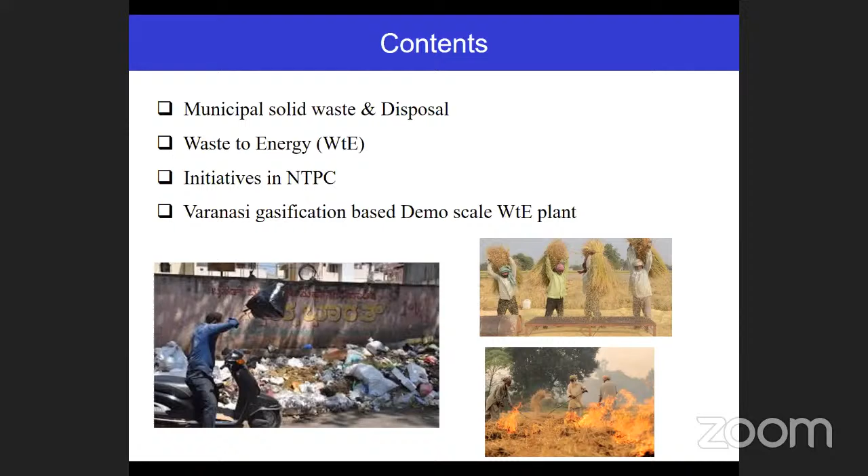Let us see what is meant by waste to energy. In this presentation, I will briefly cover contents like the opportunities for waste to energy in India, the generation potential availability in India, why we are going for waste to energy and not other technologies, and the various initiatives taken in NTPC. I will also cover a little about our maiden initiative in Varanasi, where we have installed a waste-to-energy plant based on gasification technology, which is one of the proven technologies in this sector.

When it comes to waste to energy, there is a lot of waste available — different kinds like municipal solid waste, animal farm waste, e-waste, and hospital waste, which people are familiar with. Another area is construction and demolition waste, meaning construction material waste like concrete, whenever you demolish any building or structure, you ultimately end up with construction and demolition waste. These are different kinds of waste we deal with in day-to-day life, but today we will concentrate mainly on municipal solid waste, which we call MSW.

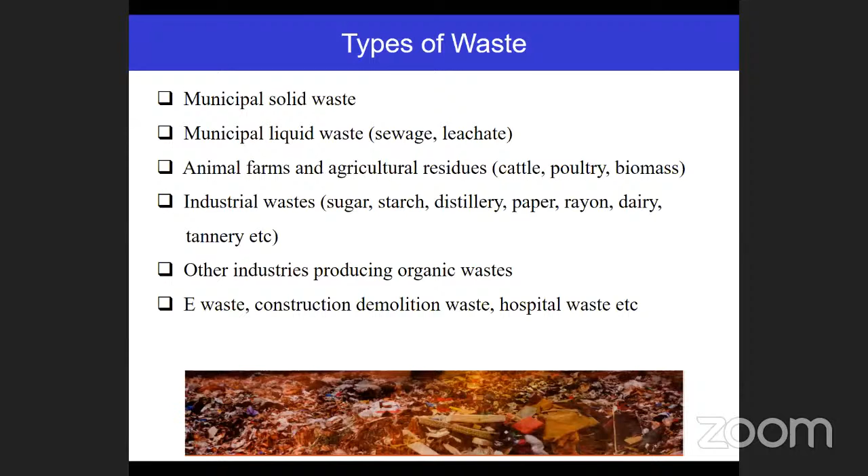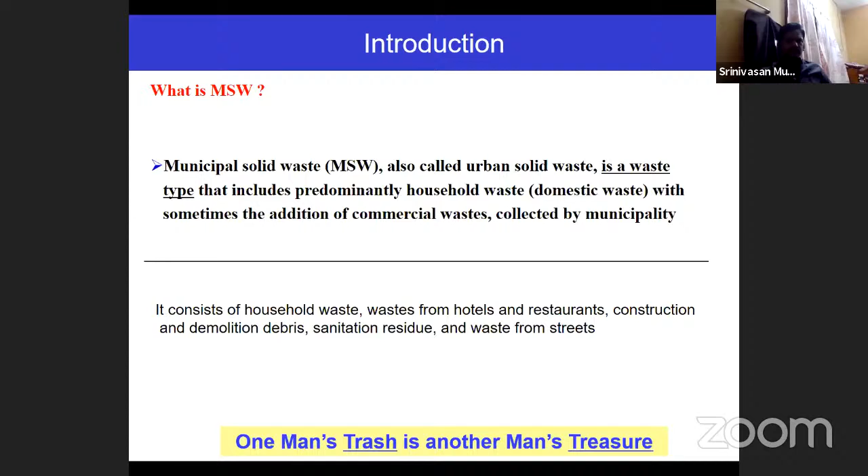The question arises, what is meant by MSW and why the name comes. This is simply called municipal solid waste: M for municipal, S for solid, W for waste. People may ask why it is called municipal - because basically it is the waste we generate in day to day life, like kitchen waste, paper, food waste, vegetable peelings, rags, and packaged materials. It originates from our household.

It is basically the waste from hotels, restaurants, or household, mainly household. Other things are minor in nature. But nowadays, one man's trash has become another man's treasure. I have been giving this presentation for the last decade, about 10 years, so I always quote this example.

There are three things you cannot avoid in life: birth, death, and waste. Whatever action we do, whatever business or activity, we ultimately end up with some kind of waste - it may be liquid, solid, gaseous, or radioactive. Every activity in society ultimately ends up in waste. But we generally call it waste until we find some useful application for it.

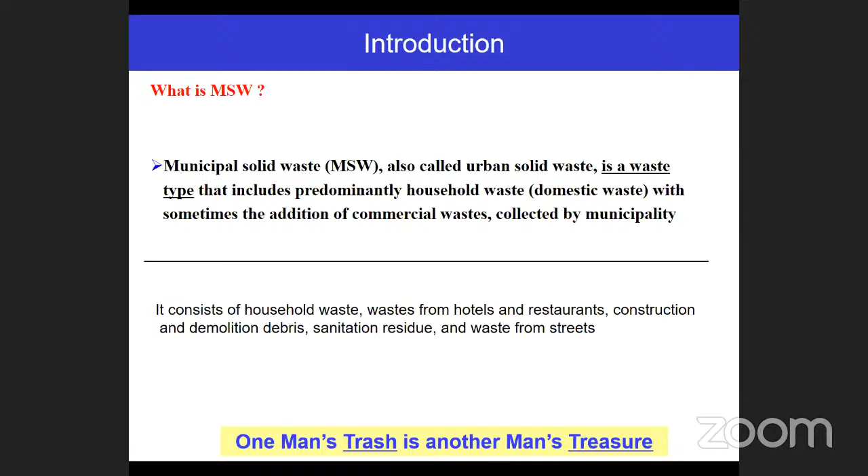So far we used to throw that cord between baby and mother, but now it has value attached to it. Whenever value is attached, we never call it waste - it becomes a resource. Similarly, we used to throw out garbage with no value attached, simply terming it as waste. But if somebody takes that waste and generates power or some useful application, it becomes a resource. So there is nothing called waste in the world until you find some useful application for it.

For example, dioxin and furan are carcinogenic gases - colorless, odorless, and not visible. These gases are produced in dump yards. In Chennai near Perungudi, there are very big heaps made of this waste, and it started burning. Any organic material kept for a long time - first the moisture in the waste gets squeezed out, and you see that black color liquid come out, called leachate. The leachate mixes with groundwater and highly pollutes it. Then as the water comes out, it becomes dry.

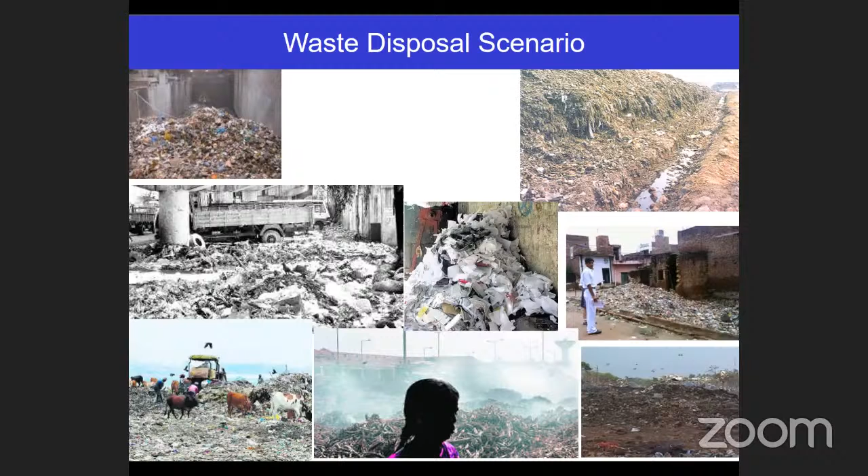But nowadays people have started giving importance to waste disposal as well. That's why I told you, there is no material in the world we can term waste until we find some useful application for it.

We must also be very careful about technology selection, the kind that people used to promote. Foreign countries generally take care of most technology development, so we must be careful in selecting or importing technologies. The classical example is we use real lemon for hand wash, but artificial lemon for making juice, when it should be the other way around. That's why we are in the dark, unable to distinguish which one is correct. So we must be very careful about technology selection as well.

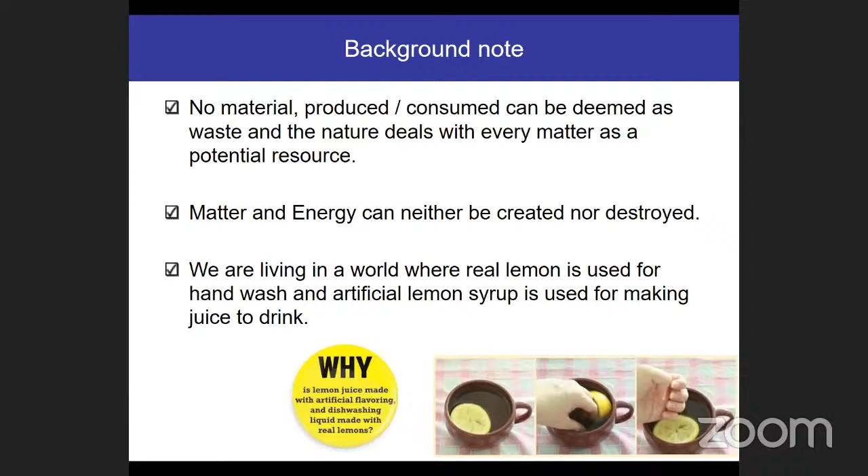Is the slide visible now, sir? Yes, sir, yes sir, please continue.

Now let us see about waste to energy. Whenever you go into any topic for scientific research, it's better to find out the history of the problem.

I am working in a coal-based power plant, that is NTPC. We are generating more than 65,000 megawatts in the country, and we are the single largest company in India. We generate power mainly from coal, almost 70%, and the remaining 30% from oil, gas, and recently we entered solar, wind, and other renewable energy sources.

As a mechanical engineer you can appreciate that there are different kinds of fuel used in our power plant: coal, gas, and oil. Even under coal there are different kinds - anthracite, bituminous, and lignite, because NLC is there, so people are aware about NLC. That is also a coal, but a different kind.

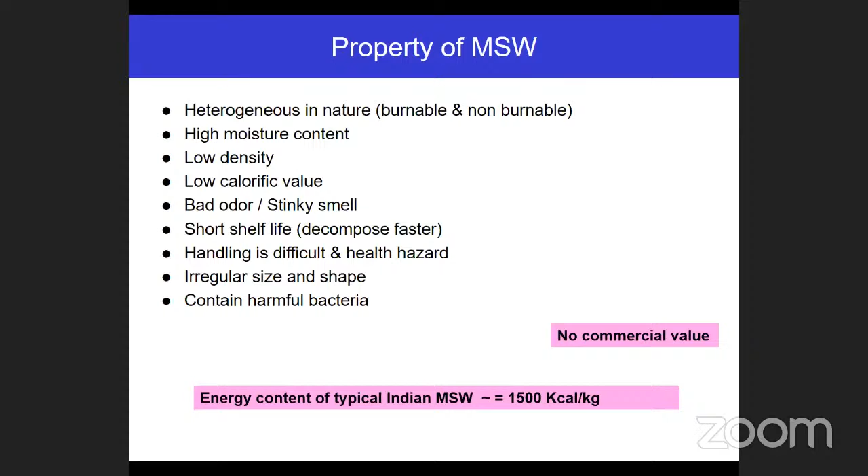Let us see the advantages if you can scientifically dispose of the waste. First of all, we can save the land, because areas like Perungudi or Noida near Delhi have a lot of heaps or mountains formed, occupying more than 50-100 acres. If you can dispose of all kinds of waste properly, you can use those lands for real estate or building common facilities. So first of all, we can save the land - it is prime land, not in the outskirts.

You can appreciate why these waste mountains are built in the city itself, because as I mentioned, we cannot transport the waste for a long distance since it has very light weight, requiring a number of trucks to transport. That's why generally all the waste mountains are built within roughly 15-20 kilometers of the city premises.

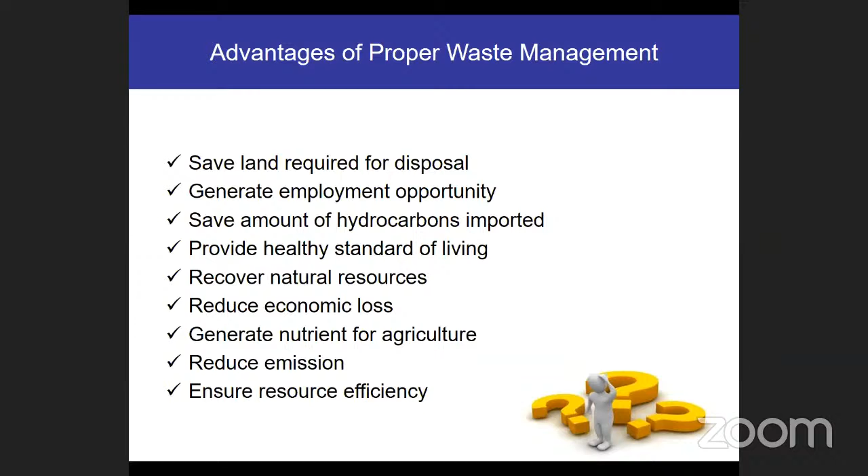So if you can dispose of it properly, you can save a lot of land, and you can also save on hydrocarbon imports because we can generate power. By generating power, you can reduce the load on thermal power plants, and it will reduce emissions - like the dioxin and furan emissions I mentioned - and it can generate employment opportunities as well. So there are a lot of advantages if you can do it scientifically.

We have seen that MSW has different kinds of constituents, both organic and inorganic waste, with different decomposition times. We must be very careful about that decomposition rate so that we don't keep the material for a long time with a short shelf life.

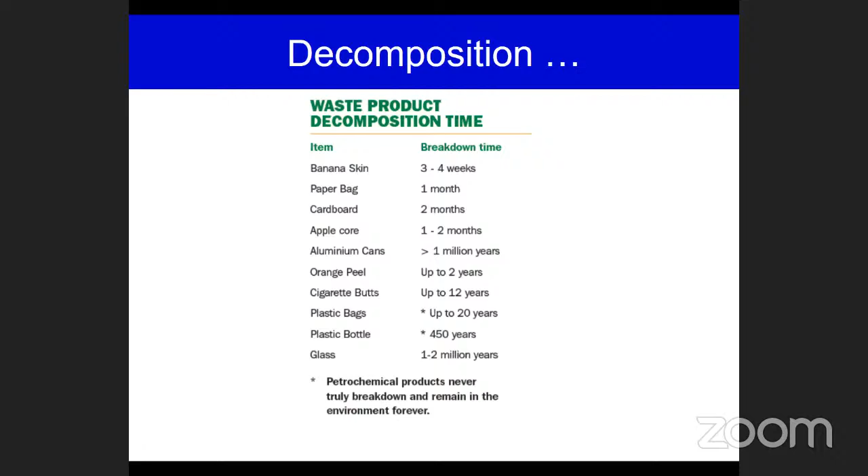Now comes a very important point: is it so critical to worry about waste disposal in India? Is it really worth spending time or energy focusing on waste-to-energy or waste disposal? You see that there are tables given here.

It was roughly a 5 to 10 year old table, but it holds good.

In Chennai, we are generating roughly around 5,000 tons per day of waste. Roughly 5,000 tons, not 5,000 kgs. It is 5,000 tons per day. And if we move towards Delhi and Greater Mumbai, it is roughly anywhere around 8,000 tons per day.

Just imagine this much quantity of waste to be disposed. One truck can handle 4 to 5 tons, and just imagine 5,000 tons. So how many trucks are required? These many trucks are plying in the city, maybe in the early morning, not in the peak hour. Just imagine how much diesel or petrol we are spending for the transportation of waste.

It is very huge. And in India, in total, 55 million tons of MSW is being generated, and it has started increasing by 5% every year. So every year there is an increase in waste disposal, because we are improving our standard of life, or improving slowly.

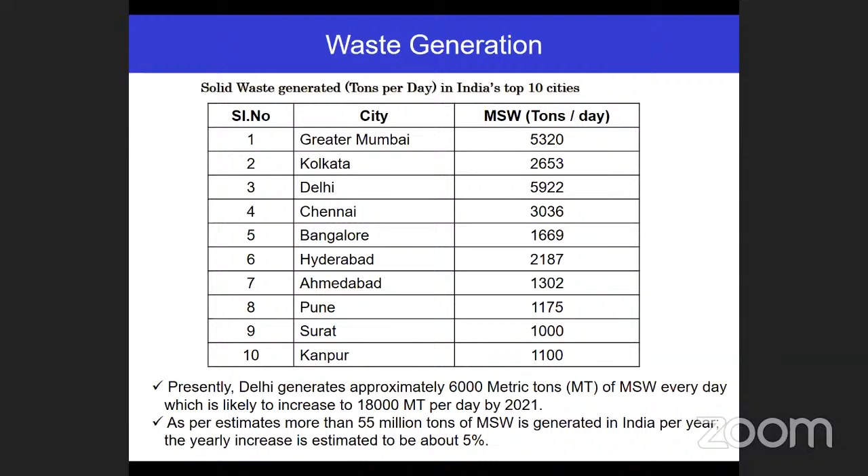So we are generating 600 grams only, but they are generating 3 kg per person per day. So it is also another indicator of development. But it should not be the case, it should be the other way around. Whenever you develop, you should also reduce your waste generation. But people used to indicate it in different kinds of methodology.

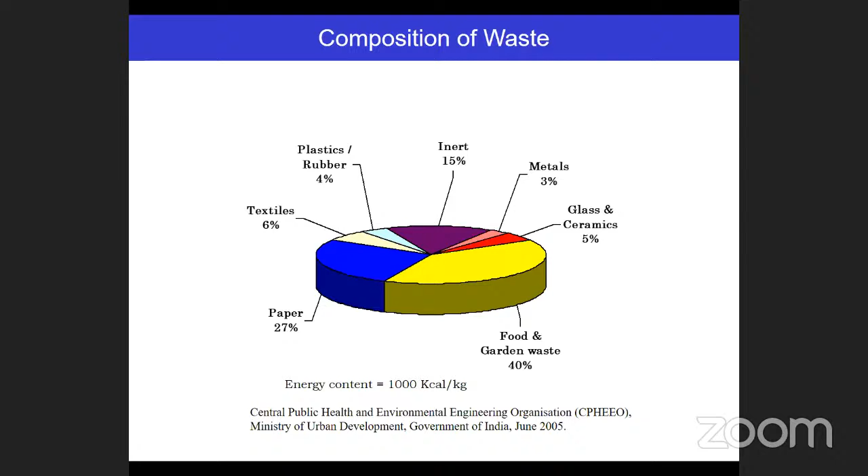When it comes to composition, roughly around 50% is food waste, and other wastes are not at that much level. Paper waste is not exactly paper waste; it's paper and small shreddings. So roughly 50% of waste is food waste. Whenever waste is food waste, the water content is very high, that is 60%. Again the same different kind of presentation only.

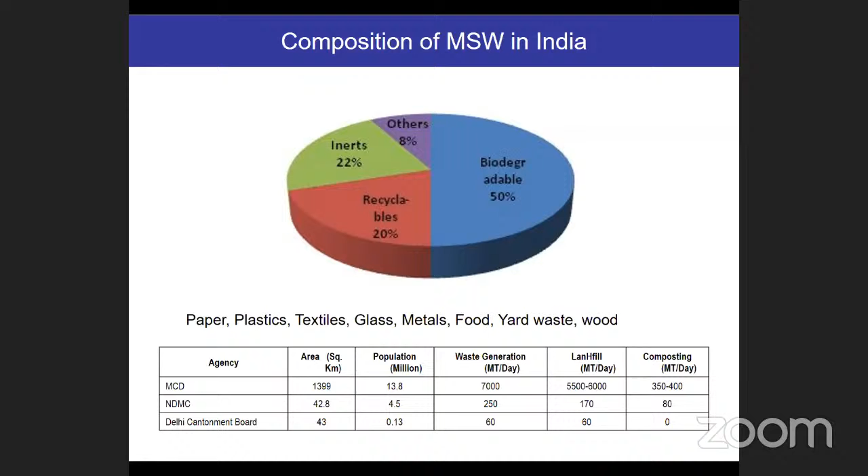It clearly indicates that biodegradable waste is called food waste. So food waste comes under the biodegradable category. It constitutes 50% in MSW, and it has 60% moisture, more than that. Other things like recyclables are a little bit less.

Then, because it is always our habit to compare with others, as human beings we always get better sleep whenever we compare with others. So comparing with others is always another criteria for our self satisfaction.

Just imagine a comparison between Indian waste and waste from other countries. LIC, MIC, HIC stands for low income countries, medium income countries, and high income countries. So high income group countries like US, UK, Japan, so-called developed countries, compared with the waste from Delhi.

The first thing you see, the first row, food waste. Their food waste is very low, average food waste is only 15 to 20%, but Indian waste is around 60%. So we are wasting more food than other countries. Whenever the food waste is more, your moisture content is more.

The next row is the paper content in the waste. Their waste has 25 to 60% paper content, but in India you see only 5%. Why? Because we used to recycle paper. The Kabadiwala, meaning the old newspaper collector, used to come and collect the paper. So that's why we recycle everything. But in developed countries, you throw out newspapers free of cost, so that's why it ends up in the waste only.

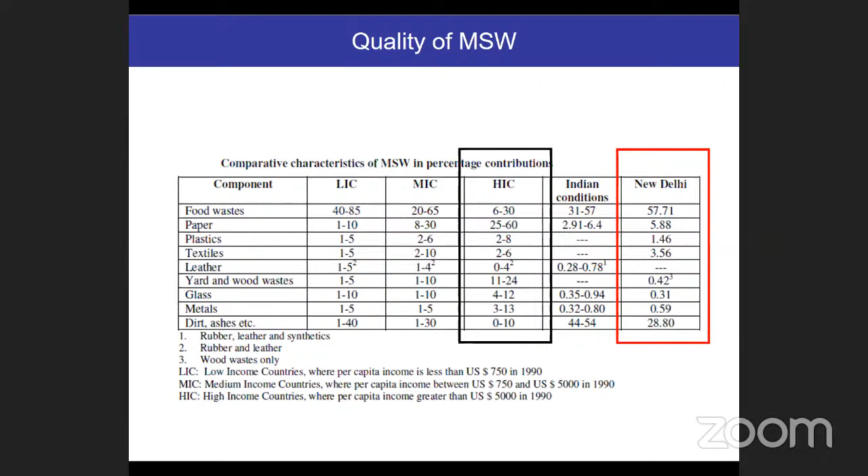If you import any technology which is not suitable for the Indian case, it is not going to work. That's why there is a lot of potential in India, because so far nobody in this world has put time, effort and money into developing a technology for Indian kind of waste. So there's a lot of opportunity for young entrepreneurs in India, academics or scientists, to develop a technology suitable for Indian conditions. That is very critical because our waste is different.

In Delhi, people used to take it for roughly 20 rupees per kg, and sometimes Big Bazaar management used to offer 30 rupees per kg, giving tokens for that. Even at my home, we used to segregate plastic bottles and other things like toothpaste tubes. If you segregate toothpaste tubes and give them to Easy Day, you get 5 rupees per toothpaste cover. That's why in India everything has a value, so we used to recycle everything available.

We must feel proud that no one can beat Indians when it comes to the recycling concept. People always say we must learn from other countries, but when it comes to waste recycling, we are the best recyclers in the world. We recycle everything, but what we throw out - whenever there is no commercial or economic value attached to it - that's only what we throw out, like MSW, municipal solid waste. So we must be proud that we are the best recyclers in the world.

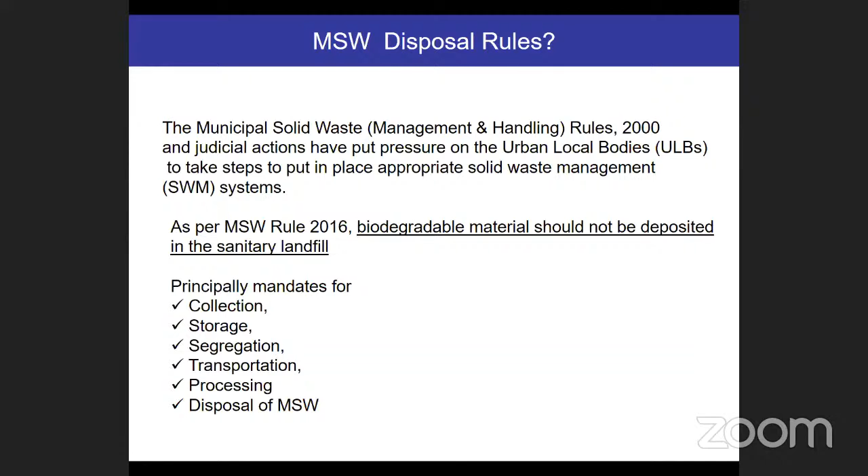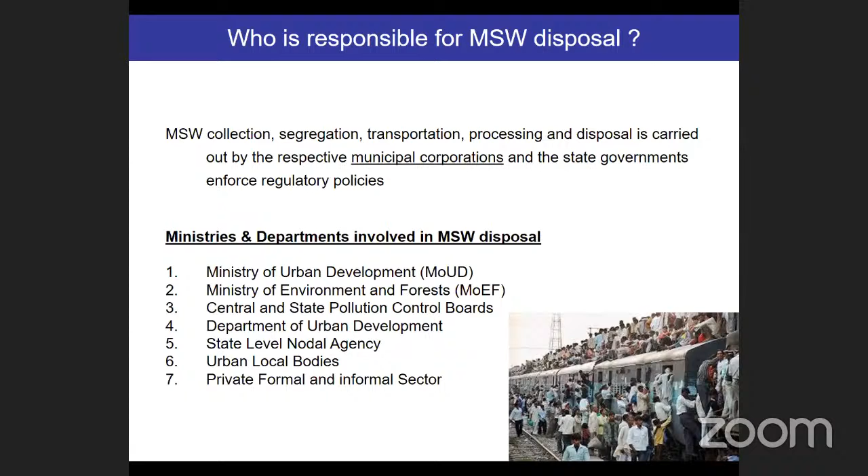But our rules say we should follow all these things, but we're not doing it so far. That's why we finally end up creating emission. Why? Because our population is so high, and there are different kinds of institutions involved - numerous institutions, though the slide mentions 7. Whenever many people are involved in a work, nothing is going to happen. You should ultimately find one person to do the work. In India, that's not the case - that's why people fight each other.

And just imagine, we are paying all kinds of tax - house tax, water tax. Sometimes cities' municipal corporations started collecting waste tax as well. I think Delhi started it, and Chennai will very soon start it too. Just imagine, for each ton they dispose, they spend around 1,500 rupees - that 1,500 figure is very old. Nowadays it's become 2,000 rupees per ton they are spending.

So in a city like Chennai, suppose generation is 5,000 tons per day, multiply by 1,500 - that's a huge amount they are spending. On what? They spend 70% on collection alone and 30% on transportation. They're only doing these 2 functions, and hardly any money or fund is spent on proper scientific disposal. If you only do collection and transportation and dump all the waste in the dump yard, it's going to create a lot of pollution.

That is emission - air emission and water emission. Whatever leachate is generated is going to affect our groundwater. That's why it's very critical - the public has to get awareness. Municipal corporations are not doing the function of scientific disposal and treatment - they're doing only collection and transportation, because they don't have enough money for that.

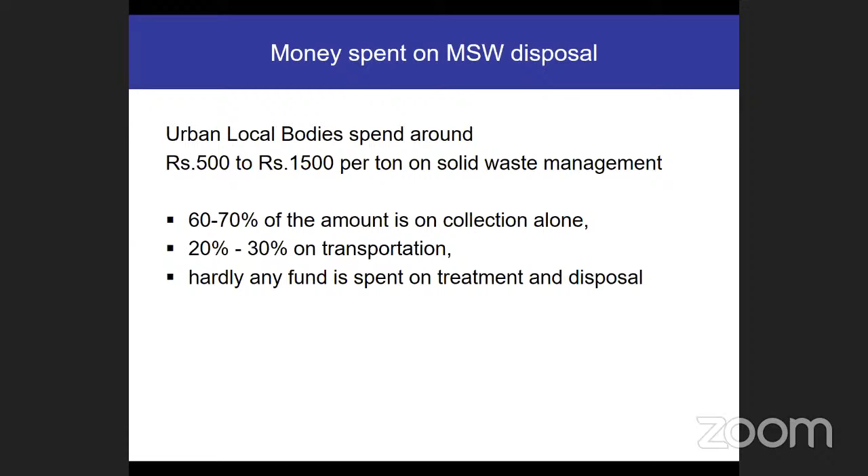All municipal corporations are running out of money. They're not financially sound, so they're not able to spend money - so it's also not their fault. If you provide enough money or fund, they can build the power plant and dispose properly and avoid the emission.

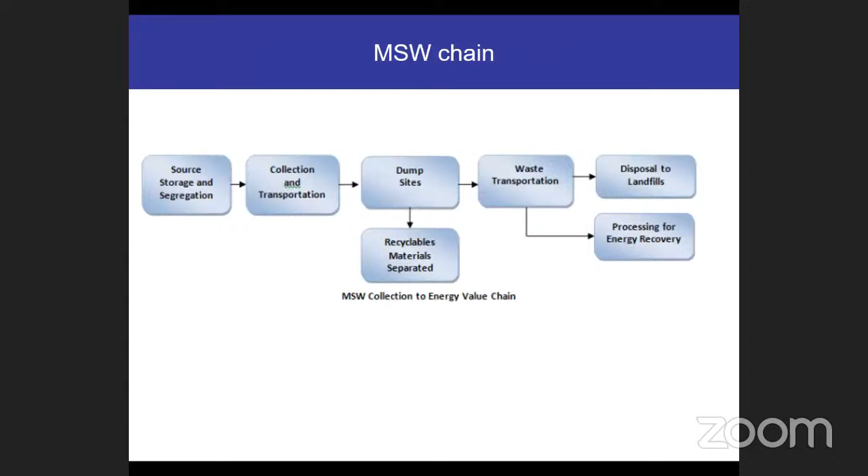And there are systems for how to transport waste and how to recycle it efficiently. There are different technologies we will see one by one in the coming slides. This slide shows the different opportunities available for how to dispose waste scientifically, and ultimately the waste becomes electricity, fuel, or thermal applications.

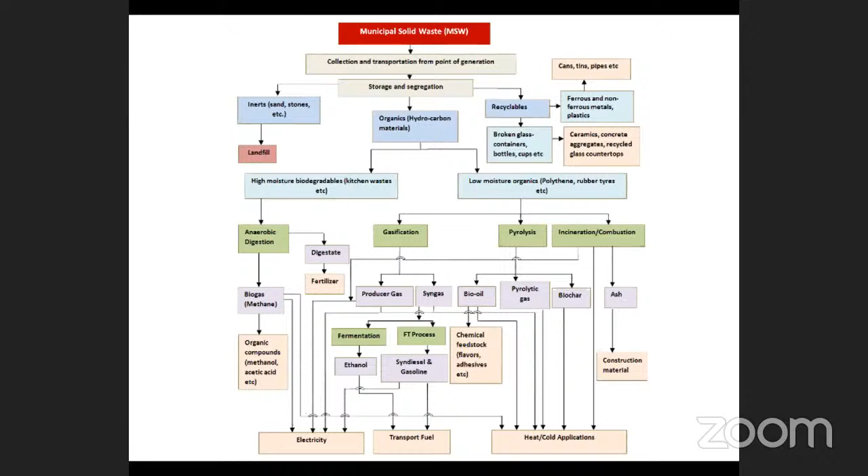There are very few technologies which are highly matured and readily implementable in waste to energy - that is pyrolysis or gasification technology, combustion or incineration, and biomethanization. The first one, landfill recovery, is not possible nowadays because in a landfill we're not able to recover the methane. Like in the case of Perungudi, there's a very big mountain - you dig a number of pipes, and if you dig the pipe, methane has to come out. But this is not coming out because our waste composition is very different. So the use of the first technology is not possible.

The second one is pyrolysis, combustion - the most prominent is incineration, also called combustion. Whatever is available, you just burn it, and whatever energy is generated, you generate power - that was the concept. Pyrolysis is a mature technology. Biomethanization is known to everyone - that's cow dung based biomethanization, and you have to use it like this.

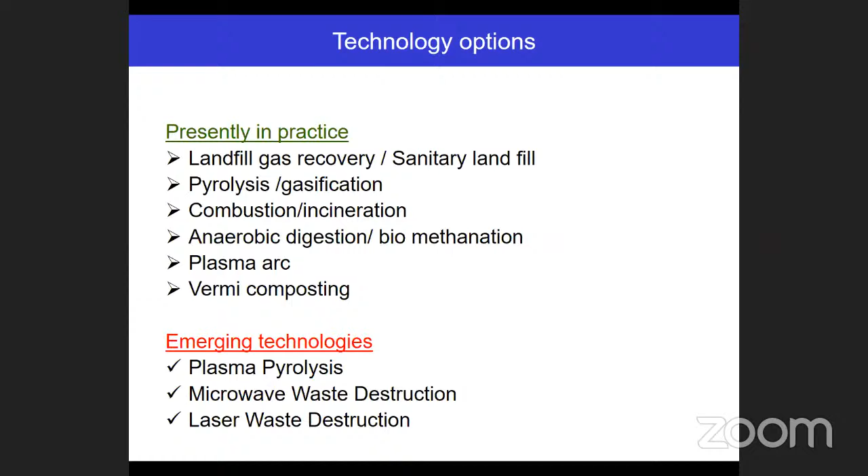There are some emerging technologies like plasma pyrolysis, microwave destruction, and laser - these are in the emerging technology stage, either at lab scale or demo scale only, not at commercial level. Each technology has its own merits and demerits. The very popular one is the incineration plants, MSW incineration plants - almost everywhere in the country and the world, mostly in Japan, even China nowadays, and UK. They combust the waste and generate power.

It creates a lot of problems, dioxin and furan problems. If you do landfilling, again there is a problem. Methane generation will be there.

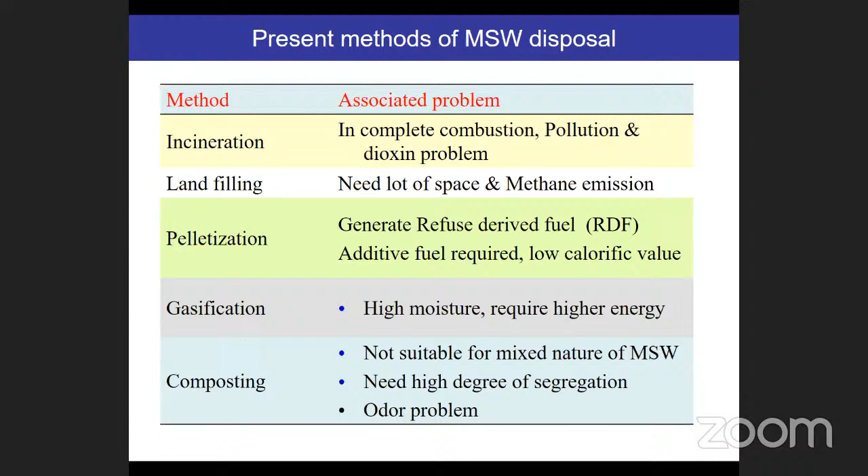And if you go for gasification, it is a wonderful technology, but if you are having fuel with high moisture, you need to put more energy for removal of that moisture. Composting is not suitable for mixed kind of MSW, and it creates odor kind of problem. So it is not so suitable as of now.

That's why waste to energy is very important, and we highly recommend waste to energy, because it reduces the volume of the waste by almost 90%.

Because the main issue is that waste occupies large amount of space in the cities wherever it is located. Very huge mountains of waste are there. It occupies large space because the density is very less. When the density is very less, it occupies more space.

So if you install a waste to energy plant, thermal destruction, waste to energy means thermal destruction, the volume of the waste will be reduced by 90%. So ultimately only 10% will be left out as ash that we can manage very easily.

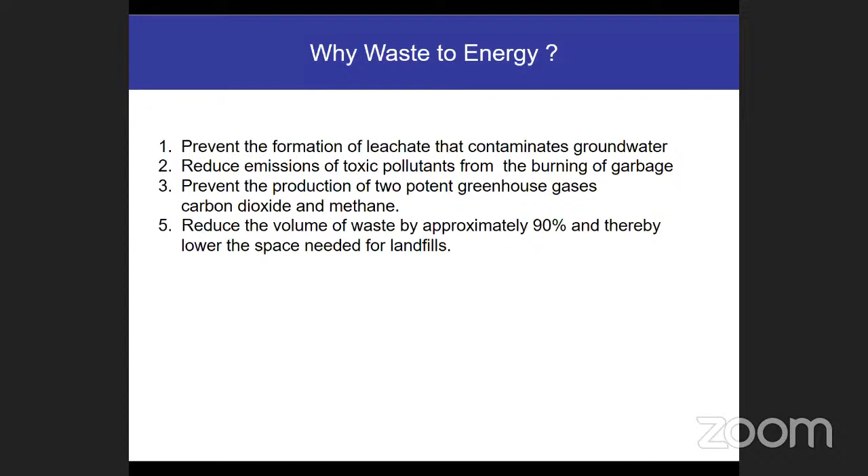And there are different kinds of technologies nowadays available which can control the emission, and safely we can run the waste to energy plant without any emission at all. That's why waste to energy is best compared to all other kinds of technologies.

Now let us see what is the potential in India. So whatever we are discussing about waste to energy problem, waste disposal, yes, waste disposal is one of the main issues in India because it creates emission and it creates carcinogenic gases. But what is the potential?

Waste to energy potential is a lot. In 2017 there was a potential of roughly around 5,000 megawatt we can generate from waste. In 2017, almost 4 years back, the MSW generation was 2,65,000 tons per day in the entire India, not only in metro cities, but throughout India. So if you use this kind of waste for power generation, as a fuel, we can generate around 5,000 megawatt. This is a potential.

It is not actual generation, it is a potential in India. This is the waste quantity available. If we employ waste to energy technology, we can generate 5,000 megawatt. But what happens actually, that we will see.

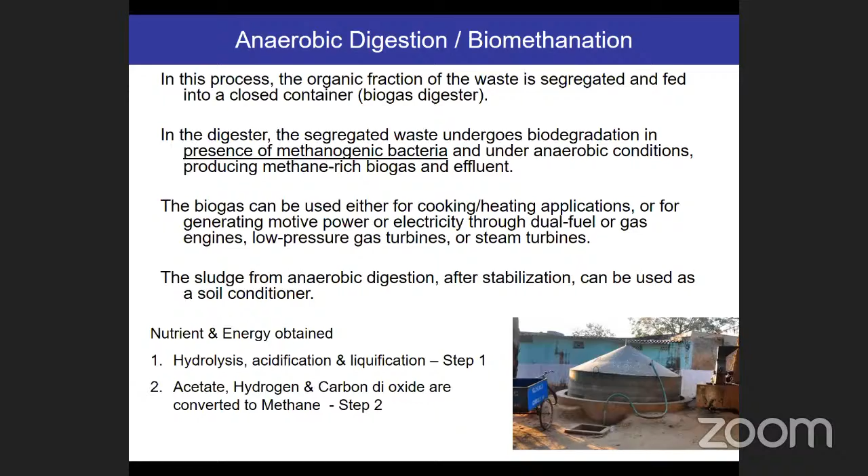I hope people are aware of biomethane systems, cow dung, and all these things, so we can skip that. In India, basically, emission standards are really stringent.

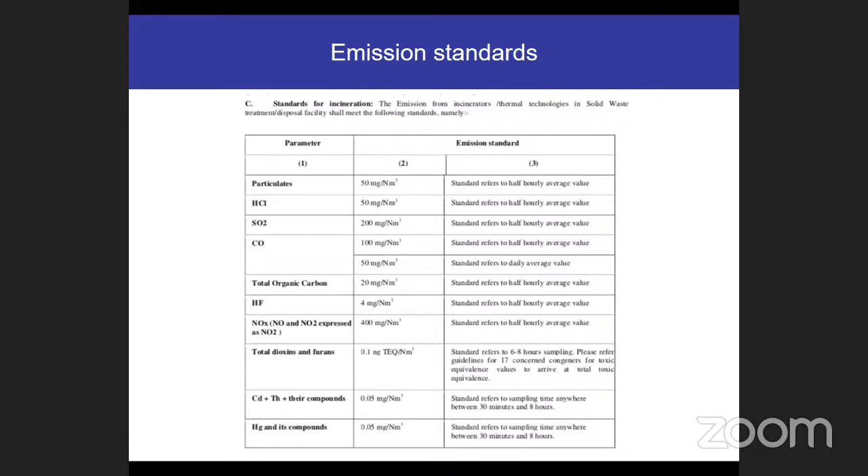We must feel proud that in India we have emission standards on par with European standards. We have taken the standards from Europe, so we are having good standards, which ensure that whenever you operate a waste to energy plant, we must follow this kind of norms so that emission levels are very minimal. Total dioxin and furans are given as 0.1 nanogram, a very small amount of pollution is only allowed. So our technology should be capable enough to meet this kind of norms.

Wherever you go, even I stayed in Japan for 3 years, so we made a custom made mixie in India and carried it with us. Although the voltage levels are different, we modified the voltage level and made a specialized mixie and carried it to Japan for our day-to-day work, chutney preparation.

You might have observed this kind of mixie, whatever may be the brand, there are different kinds of brands available in the market. Whatever the brand, you might have observed one peculiar thing: it always comes with different kinds of jars, a small jar, a big chutney jar, a juicer, some other intermediate size. There are 3-4 kinds of jars. And you might have noticed another dimension, that is different kinds of blades.

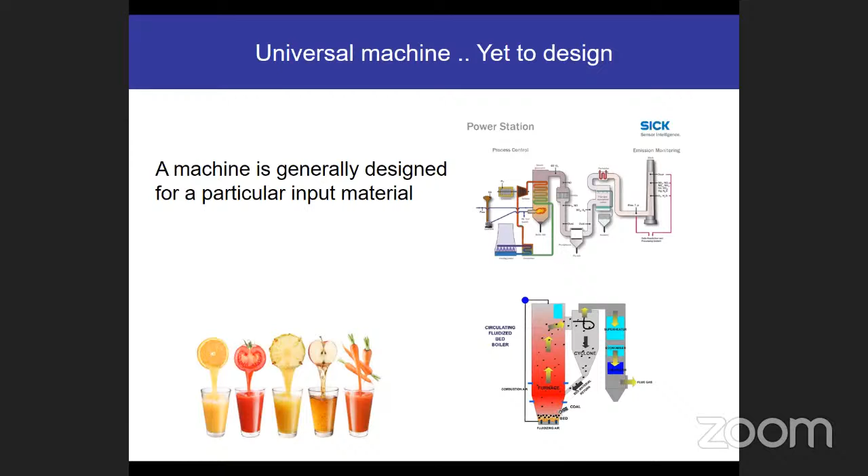That is happening in India. So far, what is happening in India? Because as a citizen, we are not putting effort to segregate the waste. We are putting everything in a single bundle, that garbage, and throwing it outside. So no one in the world is ready to design a technology - it's not possible. Technically, it's not possible. So ultimately, all the waste is ending up at dump yards, creating problems, creating emissions, and people are not aware of that kind of emission.

Monday is for paper, for example. Tuesday is for food waste. Wednesday is for glass, because in foreign countries alcohol is famous, so there are a number of bottles. So Wednesday is for bottles, and Thursday is for aluminum cans.

Friday and Saturday is for different kinds of waste, so each and every day is ordered for different kind of waste. If you are not following, you will be penalized, and there will always be a camera there. They easily find out who made this, who is the culprit, who mixed the waste. So that's why that level of conformity is there in other countries.

But in India, to start with, we should start with at least two levels of segregation: one is wet and another is dry. If we are able to do wet waste, that is kitchen waste, I can recommend easily go for biomethanization, produce methane, and methane can be used as cooking gas, heating application, or to generate power.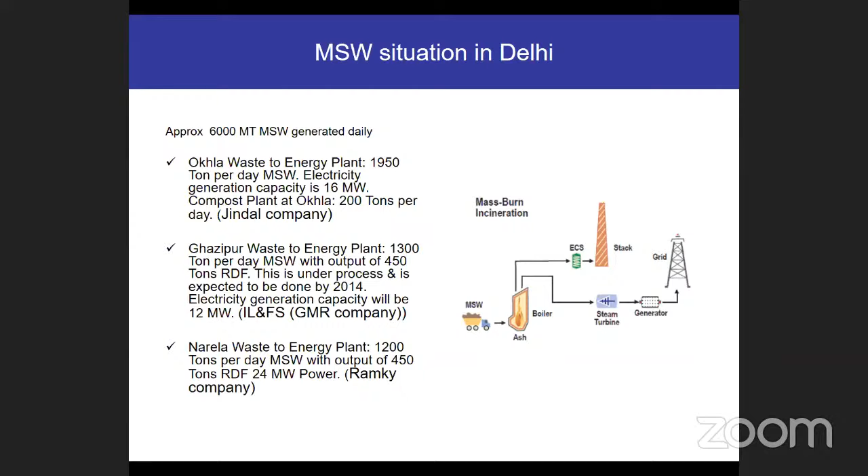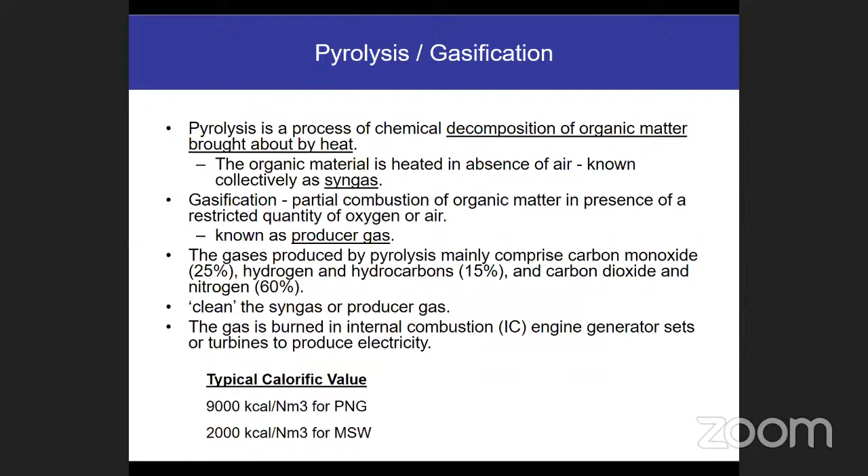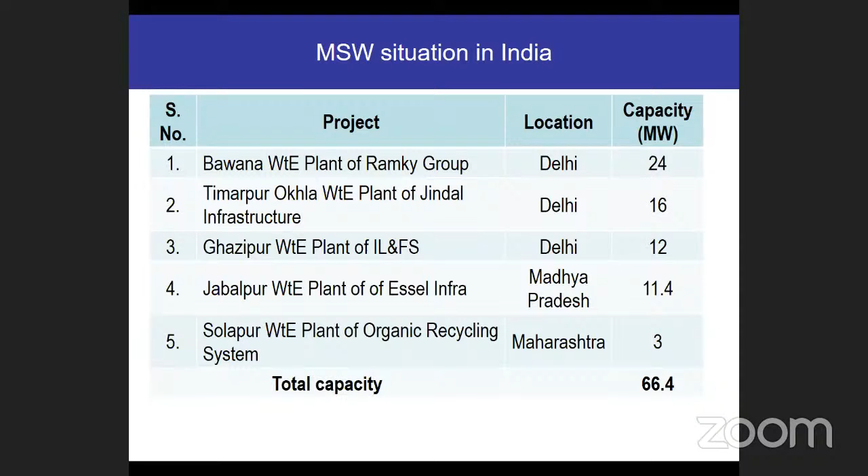That's why - challenging means there are certain opportunities, and there are major constraints because it is a very new concept, and most of the technologies are imported. No one has given time and effort to develop technology for Indian waste. Whatever 3, 4, 5 plants I showed in the last slide, all technologies are imported, and that's why it's not suitable - imported technology is not suitable for Indian waste. They are struggling to do that.

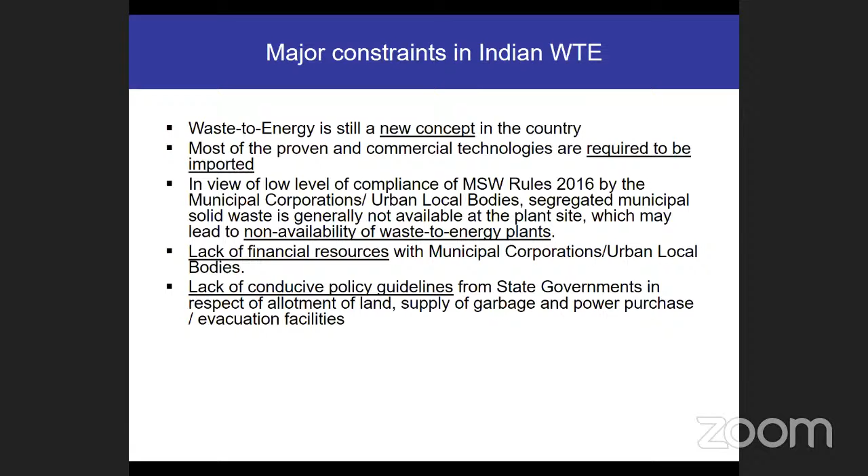If you are able to segregate, it will run very, very well. There's also a lack of financial resources, because municipal corporations in India are very poor institutions - their revenue is only from taxes. Nowadays the policy is coming up, very lucrative policies are coming from the government. Policy guidelines are required, but the present guidelines are better - conducive policies are there which can help promote waste to energy in India.

And out of the 3-4 technologies I told you about, one is biomethanation. If you use biomethanation, only wet waste can be used, we cannot use any other waste, so you have to segregate waste from waste. If you are able to segregate wet waste, you can generate 1 megawatt out of 100 tons per day of waste.

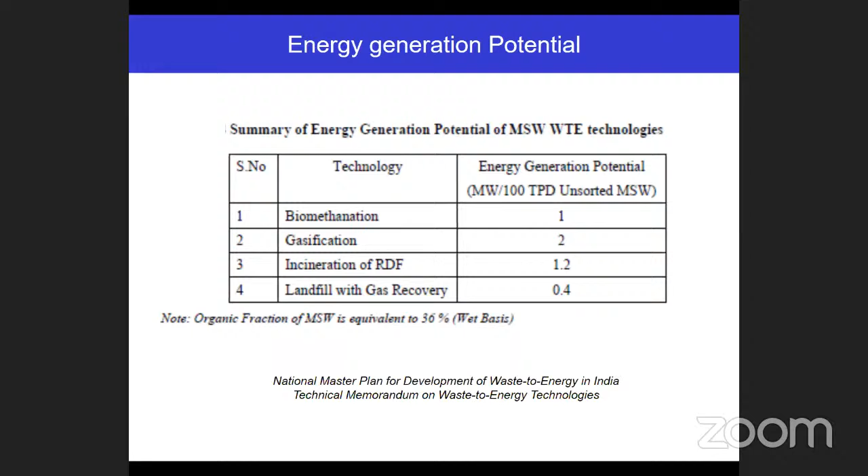100 tons per day of waste can generate 1 megawatt. But if you go for gasification technology, you can generate 2 megawatts, and mass burn gives 1.2. The fourth technology is not technically feasible nowadays. So out of the three, gasification is the highly efficient technology which can generate more power from the given waste, and there are different technologies available.

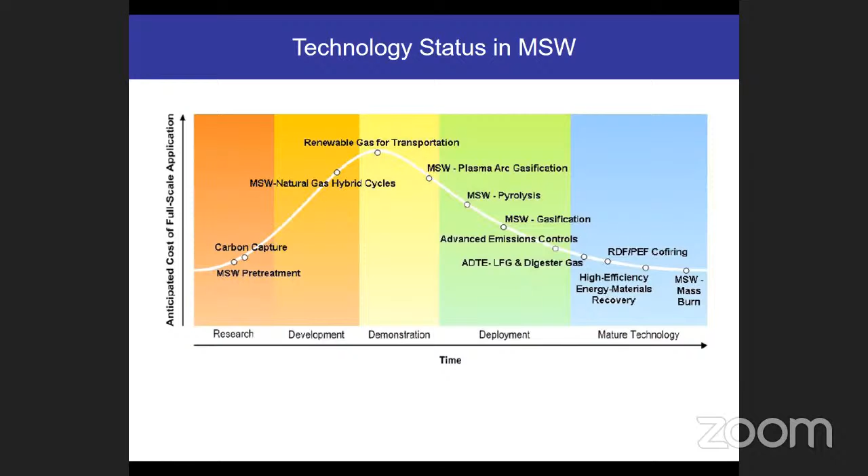Different technologies are presently at different stages. Basically only mass burn is a mature technology so far. All other technologies are either in development mode, research mode, or just prototype mode.

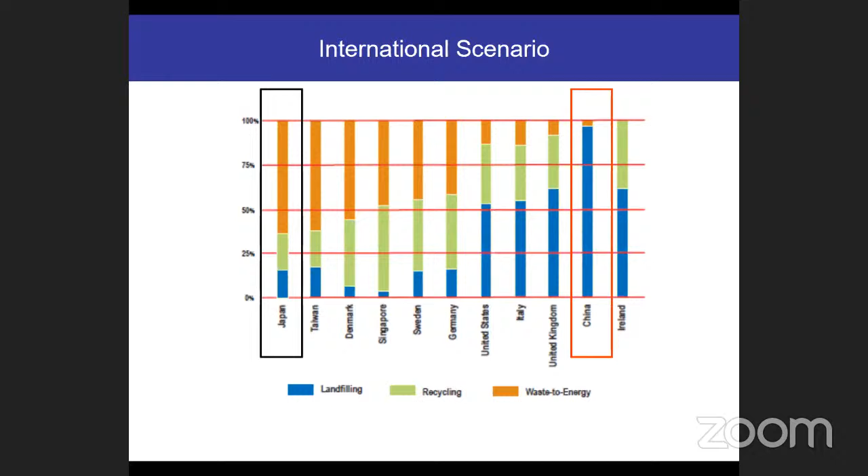What is the international scenario? How do people use this technology? In Japan, because it's a small country, they cannot afford to build a Perungudi or Noida kind of waste hill because they lack space and land. So whatever waste they generate, they go for waste to energy. They burn it, generate power, and ultimately end up with a small amount of ash, which can be used as construction material. But China, being a very big country, could afford landfilling. However, for the last decade, all modern sophisticated waste to energy plants are being installed by China—more than 200-300 plants in the last decade. So they also have gone for waste to energy. These are the growth potentials in waste to energy.

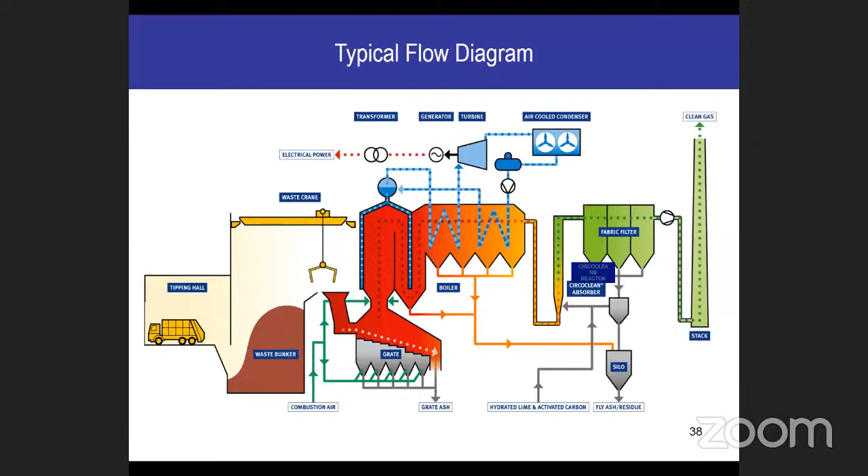Because whenever you burn the waste, due to low temperature, the waste gets converted into a lot of emissions, like SOx, NOx which is nitrogen dioxide, dioxin and furan. So that's why there are some norms - we need to maintain a minimum of 850 degrees centigrade in the boiler, so that the emission levels are low and dioxin and furans are not formed.

But ultimately, whatever may be the reason...

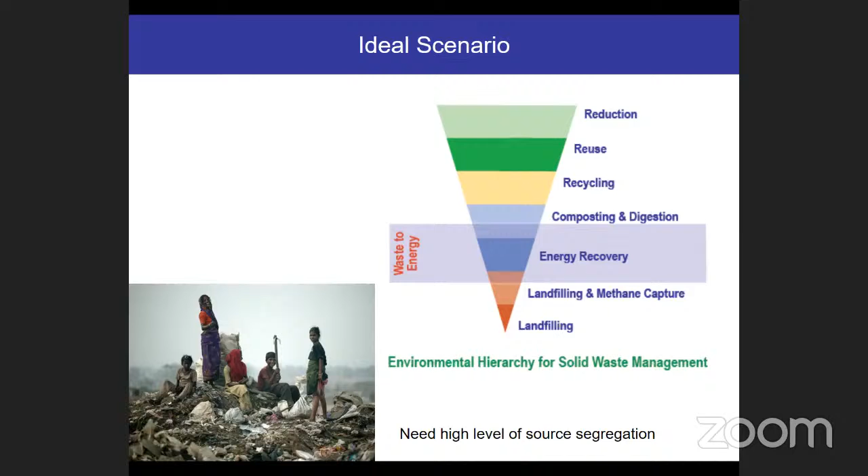Landfills are highly hazardous. They create a lot of hazardous chemicals, and the environment is completely filled with chemicals and emissions. But their livelihood is just picking up valuables and selling them. So if we can follow this ideal scenario, ultimately nothing ends up in landfilling, and their level of life is also improved.

So ultimately, source segregation is very important. Otherwise we end up with all kinds of mixed waste.

A study shows the average size of a kitchen waste bag in a four-person family - nowadays we have single families with two adults and two kids, at most four people - can generate roughly 3-4 kg of waste, which can light up a 100 watt bulb for 2 days. This much energy is there, so don't think it's just waste, but don't throw it out as mixed waste. We should always segregate the waste, at least into wet waste and dry waste, so that disposal is much easier.

Their waste to energy plants are so ideal, they never generate any emission. The technology and equipment are sophisticatedly designed and operated. They inject chemicals throughout the day, 24/7, ensuring no pollution comes out from the plant—no chemical, no waste, no noise, no stinky odor, no disturbance for the locals.

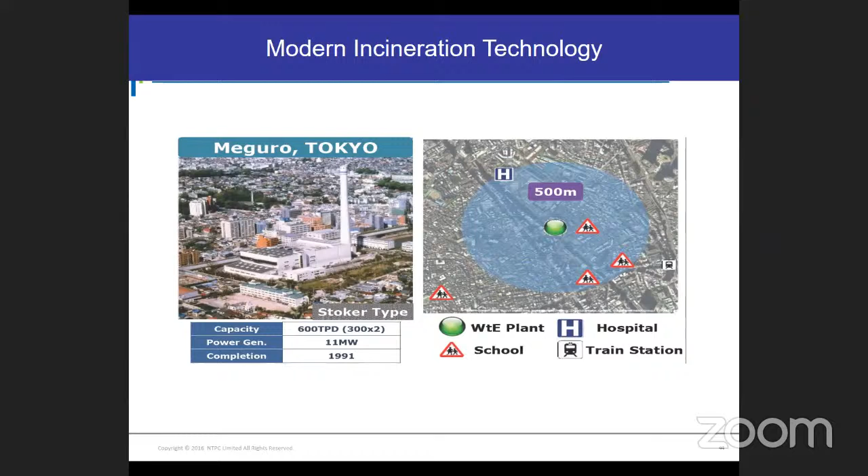But in developed countries, they invest money. Their design and operation is so controlled and transparent that it generates only a very least amount of emission. That's why it's very critical to control the flue gas conditioning as well.

One can ask, why can't we invest money in segregation equipment? Why are you asking people to segregate? I'm asking for source segregation—segregating at the house itself, wherever it's generated, at the household level.

Yes, there are machines available—a lot of machines are available. We visited a plant in Sweden. Sweden is the only country in the world which imports waste from the UK. It not only imports waste, but to dispose of it they also get money from the UK, from London. In Sweden there's a place called Västerås.

That's the place where the waste to energy plant is located. They get the waste from the UK, and they also get money for the disposal. So what they did was invest in a lot of equipment—1 to 5 different sections: feeders, shredders, classifiers, conveyors, screw conveyors, metal detectors, segregators.

All this equipment is a very big complex, but the investment cost is really high. No one can afford it—it's the only plant operating in Sweden with this kind of full mechanized segregation. First, a large amount of space is required; second, there's a lot of investment cost involved; and third, a lot of power consumption and O&M cost—operation and maintenance cost.

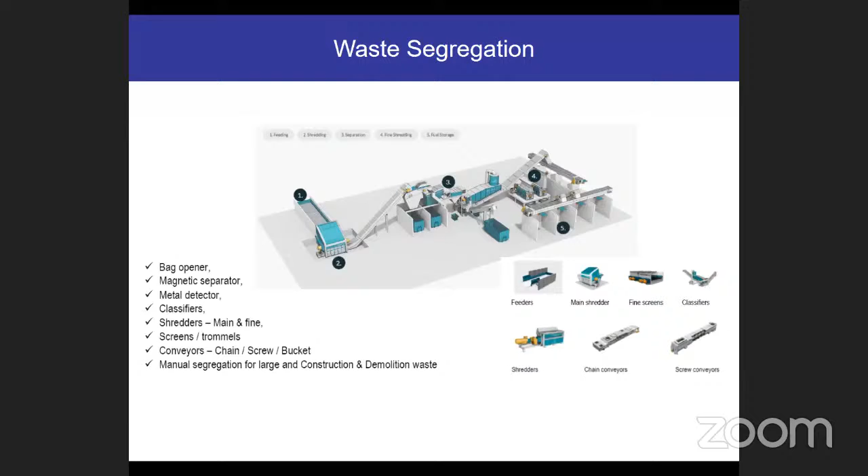It is not a commercially viable plant. That's why source segregation is very critical. So by learning from all these experiences in NTPC, we went to different countries to study the technologies, and finally we understood that customization of technology is very critical—we must develop a technology in India itself, because our waste is different. No one is going to help us.

We must develop our own technology because our waste is completely different from other countries' waste. Even if you import the technology, it has to be optimized for Indian conditions—meaning we must change designs and carry out major modifications so it's suitable for Indian conditions. Without that, imported technology is not going to work.

With this in mind, we undertook different initiatives, like why not convert waste into fuel? Because as I mentioned, waste to energy plants are capital intensive—per megawatt it requires around 20 to 30 crore. But in a coal-based power plant, per megawatt installation costs 5 to 6 crore. Waste to energy plants cost 20 to 30 crore per megawatt—it's a highly capital intensive business.

So how to avoid those kinds of investments? We went for a different approach. Why not convert this waste into fuel? When we convert waste into fuel, we can blend it with coal, because NTPC already has a lot of boilers, turbines, and equipment available. Just blend the waste with coal and use the already existing equipment, then it becomes economically easier and simple. So we thought of that way, and went for technology development called hydrothermal treatment.

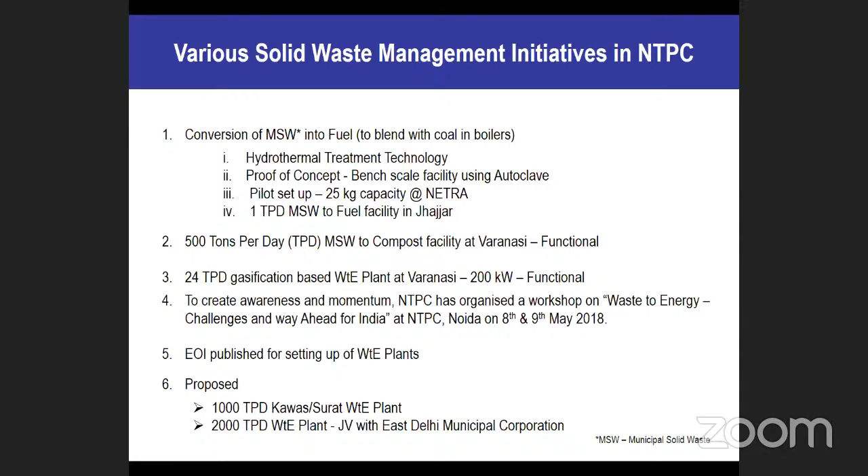Right now we are in the process of setting up two plants: a 1,000 tons per day plant at Surat, at Kawas city, and another 2,000 tons per day plant at East Delhi Municipal Corporation in Delhi. As you know, 100 tons per day will generate 1 megawatt. So 1,000 tons per day generates anywhere between 10 to 15 megawatts, and a 2,000 tons per day plant will generate roughly 20 to 30 megawatts.

This is our first approach towards converting waste into fuel, using hydrothermal treatment, meaning high pressure, high temperature steam is used to cook the fuel. This technology is simple. You know how coal is generated naturally: if you put organic material like trees under high temperature, it converts into coal. That is how coal normally changes from organic material to coal.

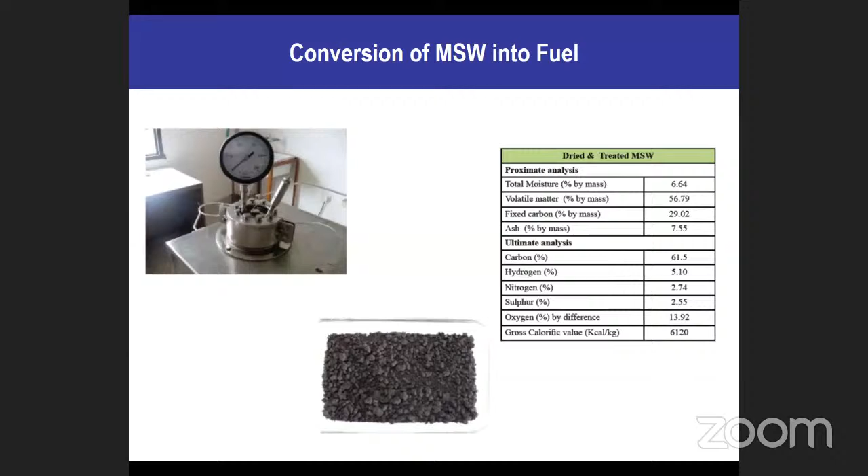We took waste from Greater Noida Authority. If you put the waste in the reactor and subject it to high pressure, high temperature steam for roughly around 1 hour, you end up with a coal-like product. This is coal having high GCV, gross calorific value, imagine 4,000 kilocalories, as good as Indian coal. So we can replace some coal in the power plant, which can easily generate power.

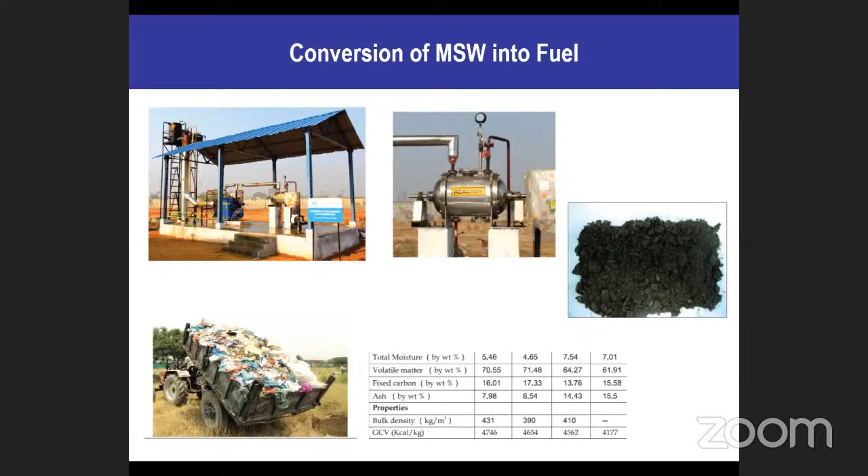This was one of the initiatives in NTPC. Another one we also started as CSR: we made a plant which was not functional. We took the plant, revived it with a lot of repair and maintenance, and now the plant is running and we are generating compost out of waste.

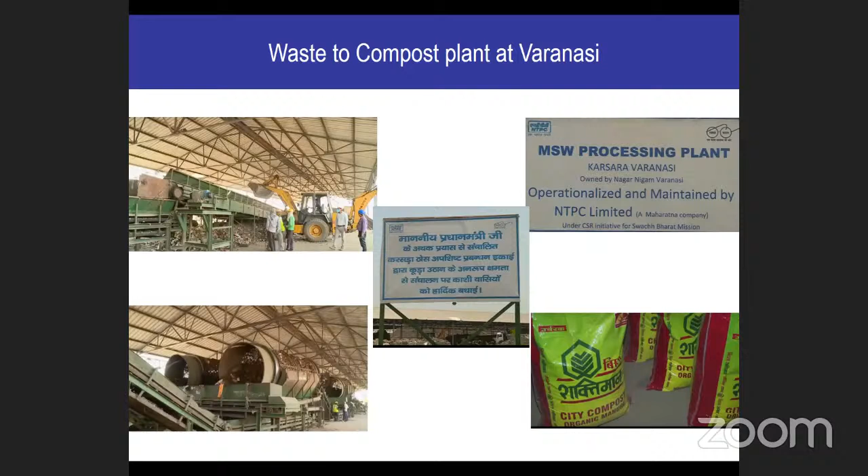Even with the compost, we need to segregate, and that's a major hurdle in the plant. Equipment is installed to segregate, but as you know, by just employing machines, we cannot segregate 100%. With a lot of difficulties, we were able to run the plant and generate organic manure.

This is the first of its kind in India to use domestic technology, a make in India concept, because we understood that the only equipment being exported from India is the gasifier. Even in UK, there are a lot of establishments that used to get gasifiers from India. Understanding this, we gave an Indian company the opportunity to manufacture a gasifier, which is generally suitable for biomass, uniform fuel biomass. But as we know, waste is highly heterogeneous, so we customized the technology for this waste.

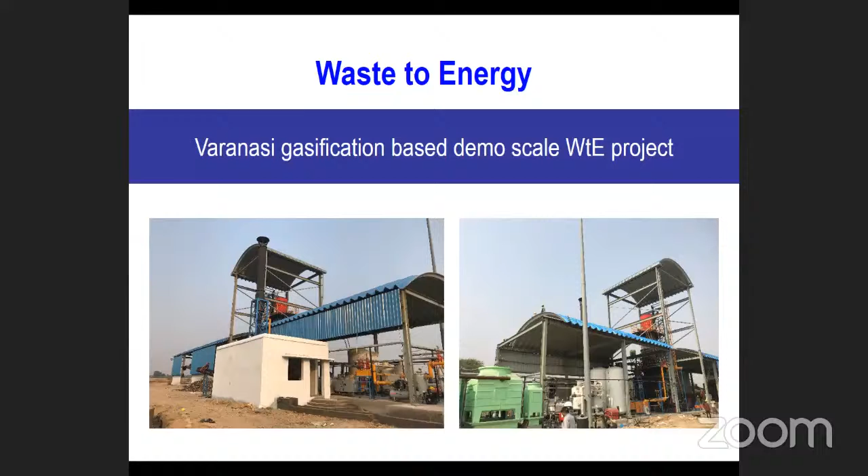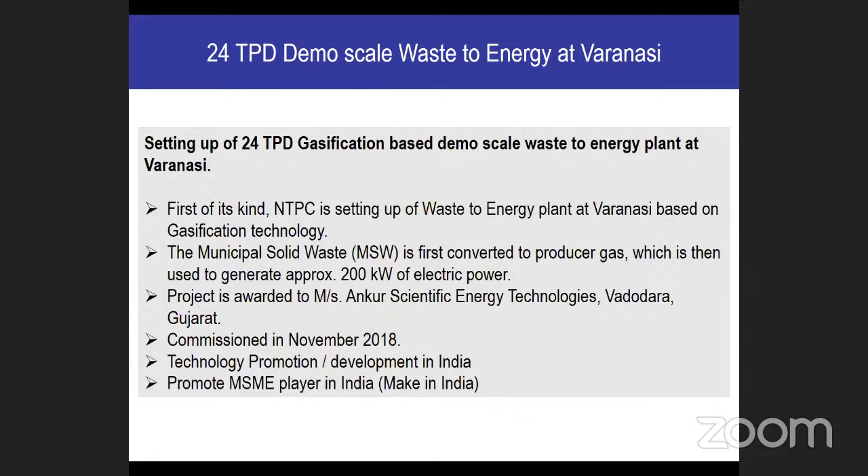So we are successful and the plant is running. It was commissioned in the year 2018. It generates around 200 kilowatts of power out of 24 tons of waste per day. It is a demo scale plant only.

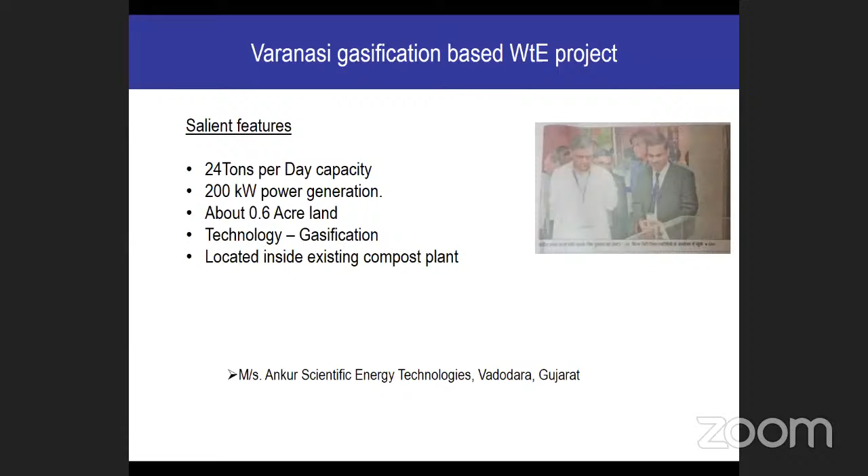It was located near Varanasi, near the landfill, the waste mountain. The salient features are: capacity is 24 tons per day, it generates 200 kilowatts of power, and the land requirement is very compact since the entire facility needs only 0.5 to 0.6 acres of land. This was inaugurated in 2018.

The main component of this technology is the gasifier. Whenever you heat fuel, it generates gaseous hydrocarbons. So we put the waste material into the gasifier. This is basically a controlled gasification process. The oxygen content in the gasifier is controlled by supplying oxygen separately from a dedicated oxygen plant. By controlling the oxygen, we can control the gasifier output, which is carbon monoxide, CO.

Whenever the CO comes out, it comes at high temperature with a lot of impurities, because whenever you heat, tar is a main issue. The tar also comes out along with the gas. So there are cooling and cleaning systems to cool the gas and remove the tar.

Once cooled and cleaned, the pure cooled carbon monoxide is given to a modified IC engine. Only the inlet valve needs to be modified; otherwise everything is similar to a diesel engine. This engine is coupled to a generator to generate power. So this is our complete setup.

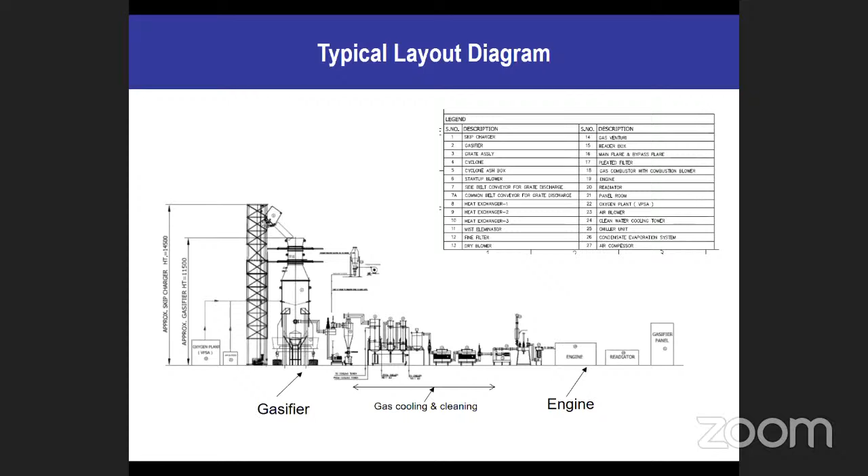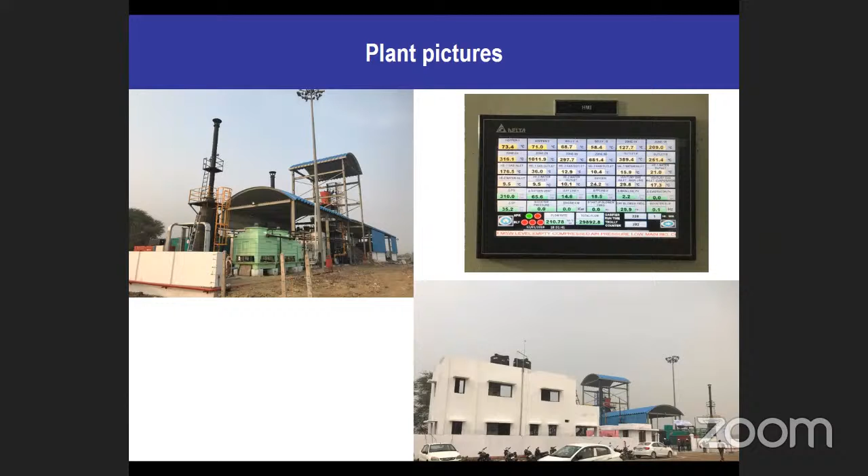The design and manufacturing, everything is done in India. These are some pictures, and the system is completely capable of remote operation—start up, shut down, and regular running can all be controlled from remote. All data acquisition systems, DAS, are there.

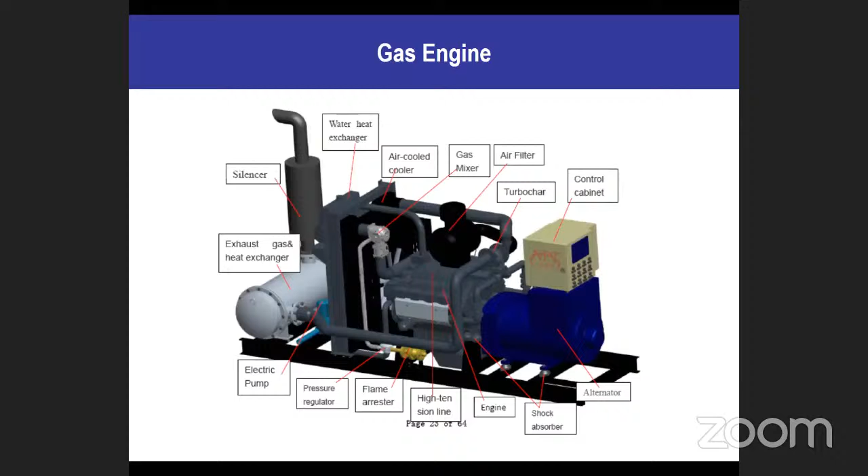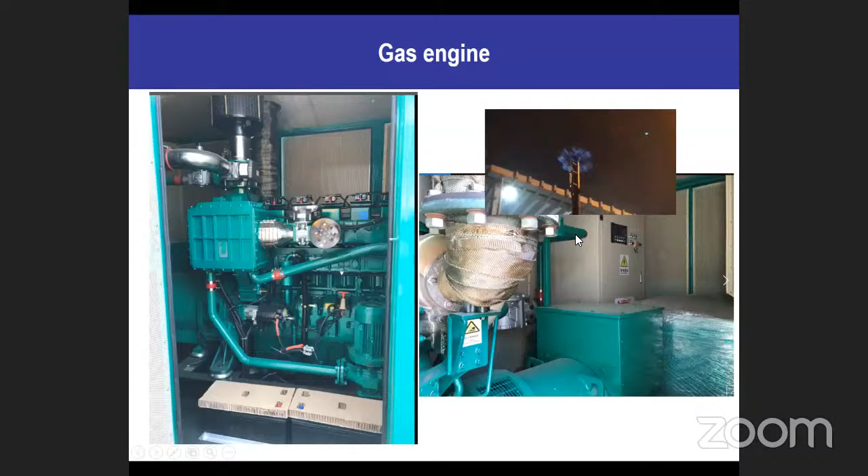By the end of this presentation, I need to give more focus on waste segregation. Once you segregate the waste, we have 4 different technologies. But all these 4 technologies still need to be optimized. That's why for an Indian young entrepreneur or even a scientist, there is a lot of opportunity to work on these 4 kinds of technologies.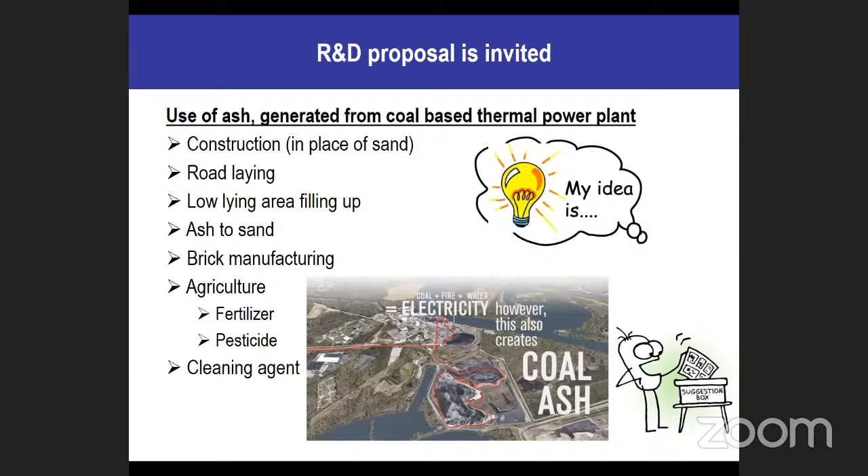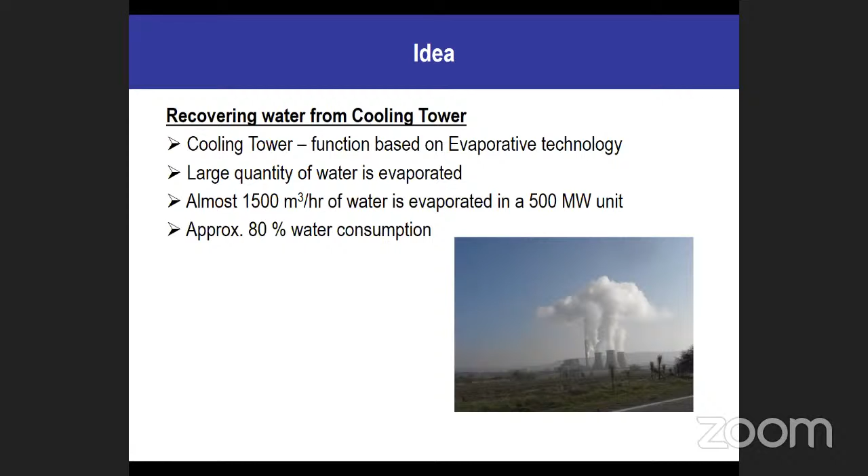Recently NTPC came up with an idea to solve the problem of Punjab and Haryana biomass. There was a challenge posed, and if anyone was able to give a solution, there was a 24 lakh reward. NTPC was even ready to fund their technology development. So there is always opportunity in India, especially in NTPC, to go for new kinds of technology innovations. Although the date was 10th January, you can expect more announcements in the coming days.

So with this, I thank you for this wonderful opportunity. May I ask Mr. Srinivasan to run the video. We made a small video on the Varanasi 24 TPD gasification-based waste to energy plant.

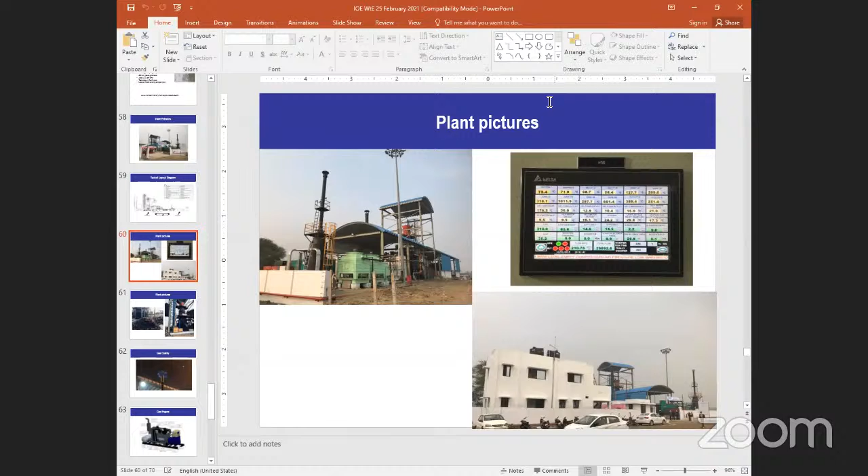I think Sumati madam, can I share the screen here? Is that possible? Can I share my screen? Is that possible, so that you can show the video? Okay sir. Thank you, madam.